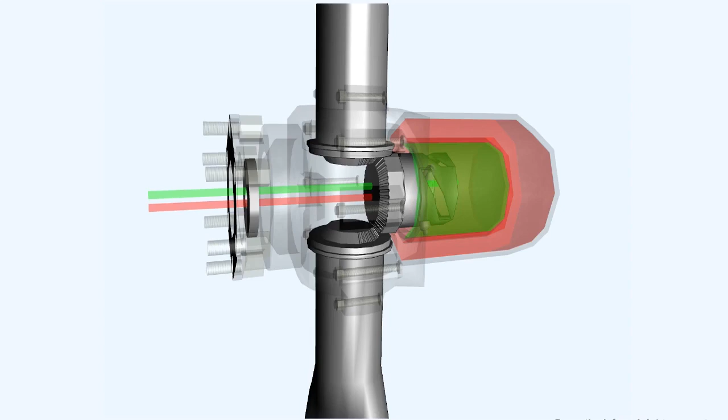Alternatively, the type of control system shown here has a similar pitch change mechanism to the single-acting propeller. Like the single-acting propeller, its pitch change mechanism is also mounted towards the front of the hub, and the cylinder also contains a hydraulic piston. However, in the double-acting system, this piston will have hydraulic pressure directed to either side of it.

Fine pitch oil is sent to one side of the piston, or coarse pitch oil is sent to the other. This eliminates the need for coarse pitch springs or gas pressure, and, with the exception of some larger propellers, the assistance of centrifugal counterweights.

The double-acting propeller's controller will respond to the various demands made by the pilot regarding the propeller RPM to control the oil flow to either side of the piston in the pitch change cylinder in three ways.

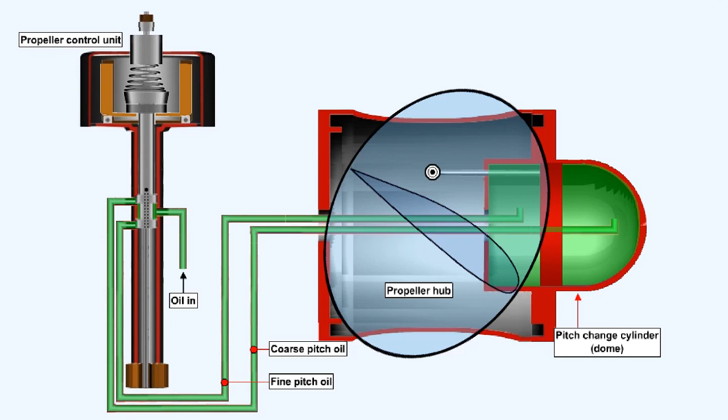If the propeller is underspeeding, then the flyweights will be leaning inwards because of the reduced centrifugal force, allowing the speeder spring to push the landed valve downwards. This will allow the unit to supply oil to fine off the pitch of the propeller, while simultaneously porting coarse oil to return. The piston will move to fine off the blades, causing an RPM increase.

If the RPM is as required, in other words the propeller is on speed, then a hydraulic lock is formed which traps oil both sides of the piston, maintaining the blade pitch constant.

If the propeller is overspeeding, then the flyweights will be forced outwards by centrifugal force, compressing the speeder spring and allowing the landed valve to move upwards. This will simultaneously allow coarse oil to be ported to one side of the piston and fine oil to drain back into the engine from the other side. The piston will move to coarsen the blade pitch, causing a decrease in RPM.

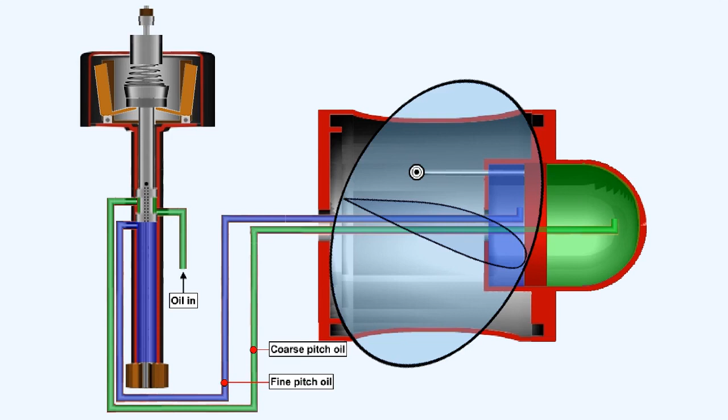A constant speed propeller must be capable of all the pitch change operations mentioned previously, as they are selected by the pilot moving the RPM lever in the cockpit. The system must also be capable of maintaining a selected RPM within its own operational limits, regardless of changes in airspeed, altitude, and engine power setting.

When the constant speed unit senses that the RPM is as has been selected, the system remains in a static state. However, any change in airspeed, altitude, or engine power setting will result in a tendency to either increase RPM above or decrease RPM below the value selected.

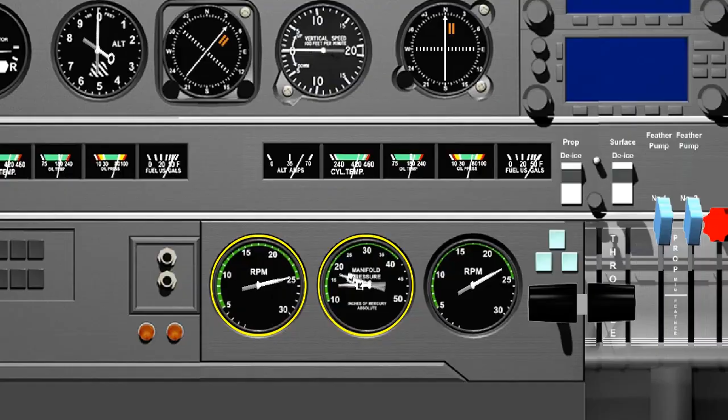As we've seen already, a tendency for RPM to increase, an overspeed condition, will be countered by a supply of oil being fed to the coarse pitch side of the piston in the pitch change mechanism. As is shown in this animation, the pitch will then coarsen and propeller torque will rise as a result of the increase in the blade angle of attack. Propeller torque now exceeds the engine torque and will cause the RPM to decrease back to the selected setting.

As the RPM regains its previously selected value, the movement of the landed valve in the constant speed unit, which directed the oil flow in the first place, is progressively reversed until it regains the sensitive position, where a hydraulic lock holds the position in the pitch change mechanism immovable until the next RPM selection or disturbance in airspeed, altitude, or engine power setting.

A tendency for the RPM to reduce, which is termed a propeller underspeed condition, must be countered by a supply of oil being fed to the fine pitch side of the piston in the pitch change mechanism.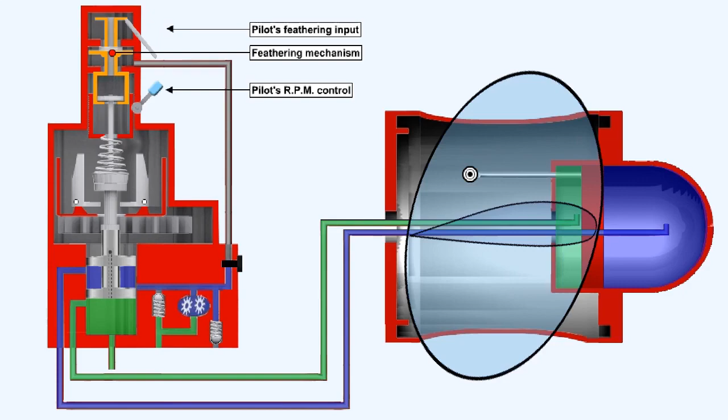The actions required to feather a propeller are dependent on the type of engine and propeller combination and the type of aircraft they are installed in. For single-acting propellers, this normally involves moving the propeller condition lever, or RPM lever, to the feather position.

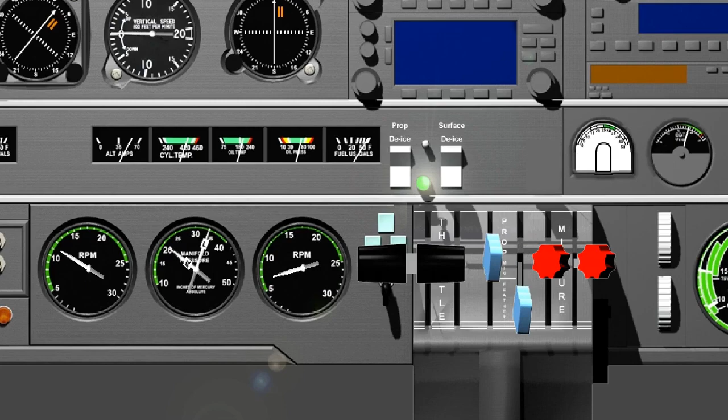Moving the appropriate lever to the feather position mechanically lifts the landed valve against the speeder spring to its highest position, thereby simulating an exaggerated overspeed condition. The landed valve will remain in this position until the feathering control is moved back to its normal position.

Any oil in the pitch change cylinder can now drain away, allowing the spring or gas pressure, assisted by counterweights, to move the piston onto the feathering stop.

To unfeather the propeller, the speeder spring tension is released by moving the propeller control lever to a position comparable to that of the serviceable engine, which of course is running at normal operating RPM. This moves the landed valve down and connects the reserve oil pressure line to the fine pitch side of the propeller pitch change cylinder.

A reserve of oil pressure may be supplied by means of an accumulator, which is charged continuously during normal operation. By activating a release valve, oil pressure from the accumulator is directed to move the pitch change piston to fine pitch.

Alternatively, some systems may utilize an electrically operated unfeathering pump, or, on some smaller systems, the engine may require motoring over on the starter to build up sufficient oil pressure.

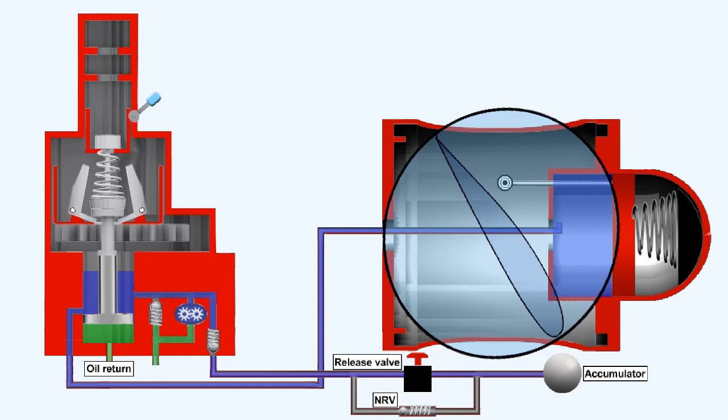Once the propeller blades have moved away from the feathered position, the propeller will start to windmill, and as long as the engine has fuel and ignition, it should start.

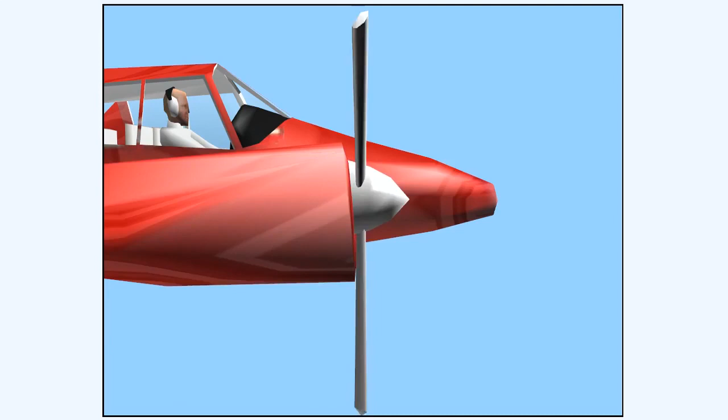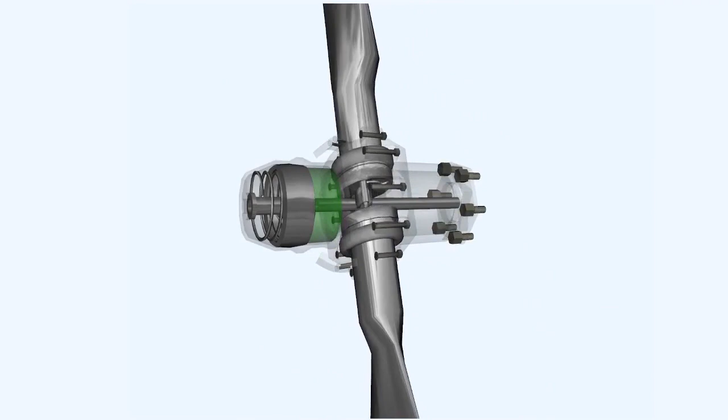When an engine fitted with a single acting propeller is shut down after flight, the propeller should be at the fully fine pitch position. There is a considerable quantity of oil trapped under pressure on the fine pitch side of the piston in the pitch change cylinder, which is holding the propeller in the fully fine position. This oil pressure is being opposed by the force of the feathering spring.

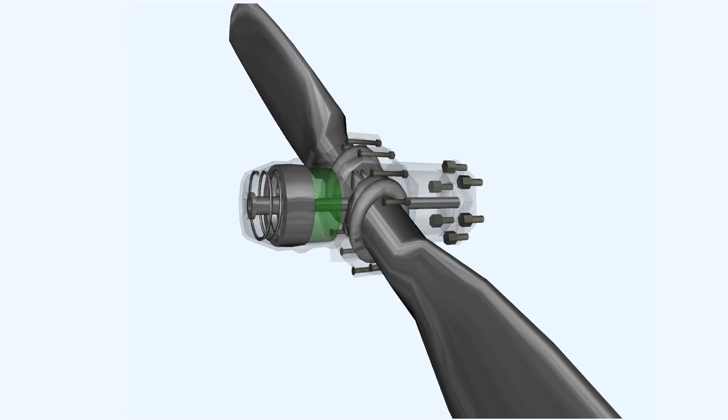After engine shutdown, the trapped pressure will gradually leak away past the landed valve in the constant speed unit. As this trapped hydraulic pressure leaks away, the feathering spring is able to slowly push the propeller blades towards the fully feathered position.

While this condition would be acceptable to a turboprop with a free power turbine, it would result in an unacceptably high loading on the starter motor of a piston engine or direct coupled turboprop. So, to prevent the feathering spring pushing the blades all the way to the feathered position, on those engines where a feathered propeller would cause stress on startup, centrifugal latch pins are incorporated in the pitch change mechanism.

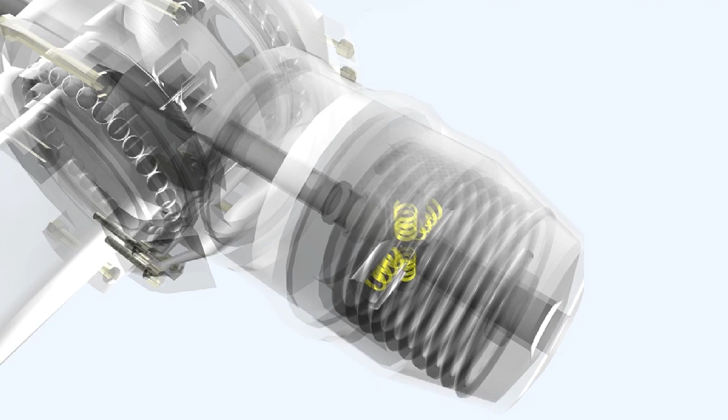The latch pins are held disengaged by centrifugal force while the engine is running. As the engine RPM reduces, small springs behind the latch pins overcome centrifugal force, and they are allowed into contact with the piston mechanism. Typically, the value of the RPM at which the latch pins become engaged is around 650 to 700.

After engine shutdown, the latch pins engage with a groove in the piston mechanism, which locks the piston. This prevents it from being pushed beyond a predetermined blade angle, and further into the feathered position by the feathering spring.

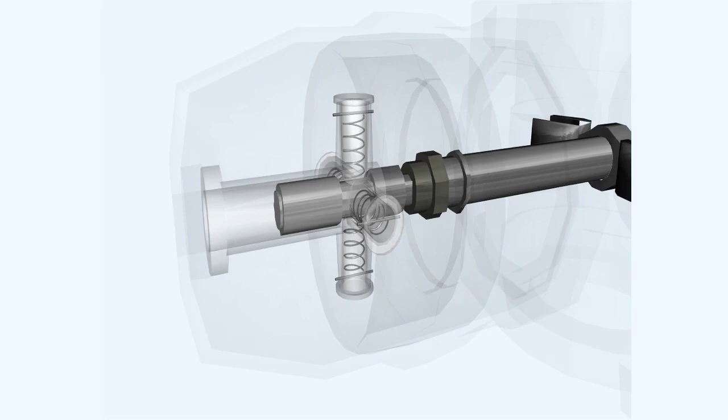When the engine is started and RPM increases, centrifugal force will disengage the latch pins. Fine pitch oil will quickly build up and hold the propeller against the fine pitch stop.

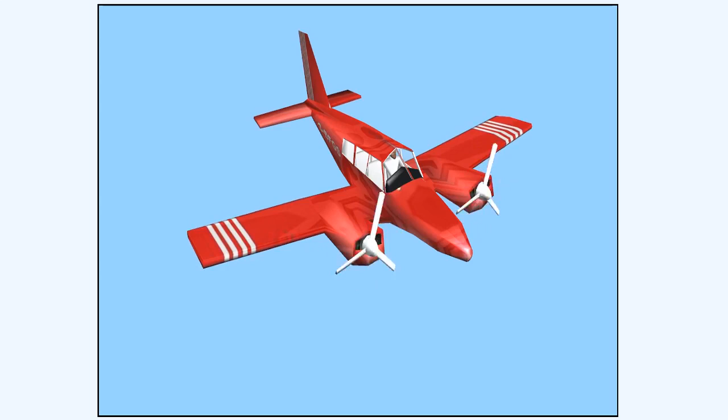Note that if a propeller engine combination does have a centrifugal latch mechanism fitted, it may become impossible to feather the propeller of that engine once its RPM has fallen below the latch setting value. This is because once they are engaged, the latch pins can prevent the piston being moved any further by the feathering spring. It is thus extremely important to complete the feathering drill before the RPM decays below this figure.